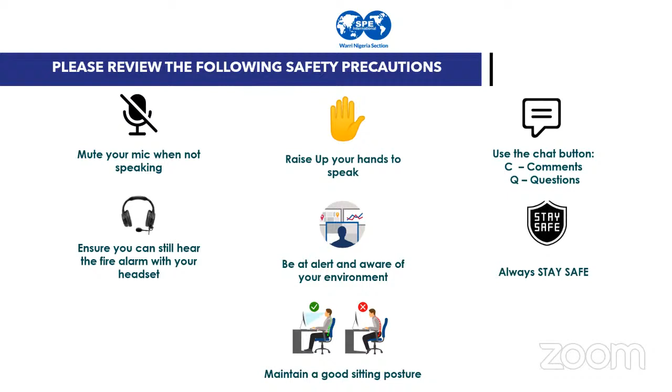Okay, thank you very much, Engineer Chris Egwatu. You can't get it better anywhere else with HSE remarks other than when it's coming from Engineer Chris Egwatu, the one who has been at the helm of affairs of HSE at even the council level for some time now. Thank you very much, sir. We appreciate the safety remarks you've given to us, and I'm very certain that we would abide by them and run with them in the course of this program and even beyond.

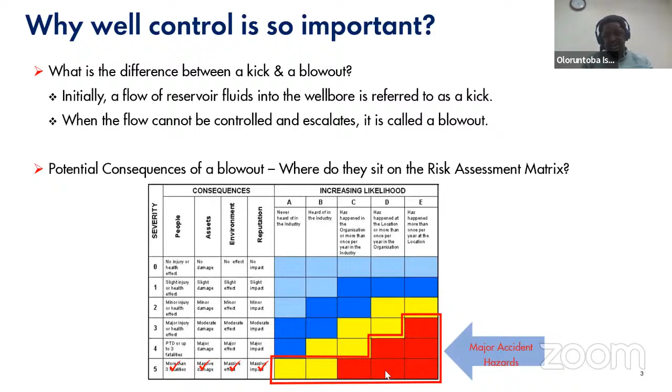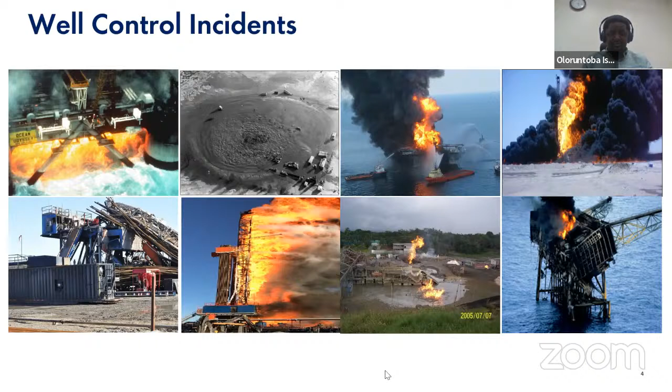Recently this year, in March, somewhere in Central Africa, Gabon, about 6 people lost their lives due to a well control incident. About 6 years ago, I think 2018, in Oklahoma in the US, Pryor Trust, we had about 5 people losing their lives as well. And that's just in terms of lives - there's also significant impact with regards to assets, environment, and so many other things.

And that's why we have this session. It's important that we understand how we prevent well control incidents from happening, and even when they do happen, how do we manage it? How do we enter what we call the recovery mode to prevent it from escalating.

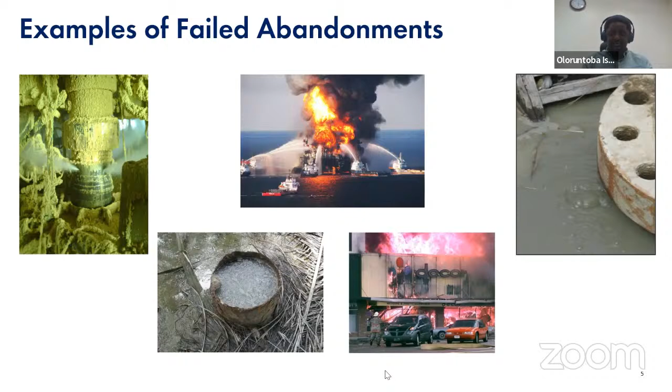In 2021, IOGP, the International Association of Oil and Gas Producers, released a report showing that of a couple of incidents reviewed, the majority of causal factors were due to human factors and human behavior. Some other aspects had to do with barrier failures and improper assessment of risk, or not properly appreciating the risk involved, and some other bit had to do with not following the procedure as required. That's why this presentation will cover some of these things, because I think it's quite critical.

One of the things I'm going to show you in a couple of slides is that even if your equipment is fit for purpose, functional, and spot on, and even if you have the best procedures and programs in place, you also need to consider the human behavioral aspect. This is an aspect that hasn't been in the industry for so long - post-Macondo it's come up, and IWCF and other well control regulatory bodies have tried to embed this even in terms of training and competence.

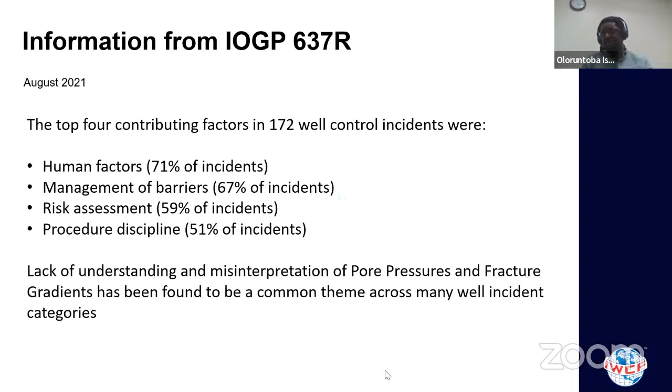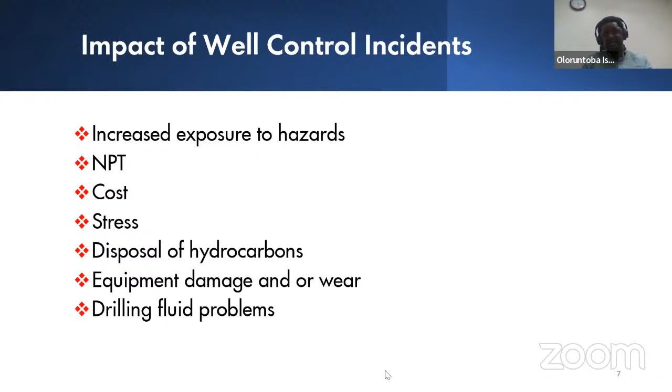Okay, so impact of well control incidents. I showed you a couple of pictures. Apart from downtime and non-productive time, there's significant impact in terms of cost, equipment damage, and exposure to hazards. Remember, you are in the oil and gas environment, and all these things are flammable.

So HSE impact, deaths or injury. I reeled out a couple of numbers, which is quite sad. Of course, you also have pollution, whether it is air, land, or water. The remedial costs post Macondo incident cost billions of dollars just because of the impact on the marine and water body.

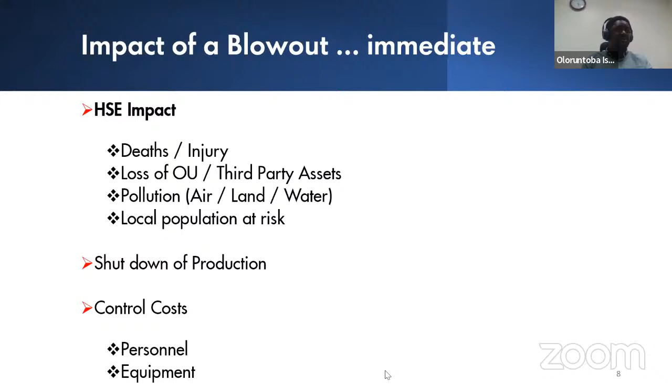Same with land and even the air as well. Of course, you put in the risk, you put in population close to that place, especially land locations at risk, and all of that. You would have to defer production, everything shuts down, and then of course, damage to equipment significantly as well, your company image, or what we call reputation. There will be a lot of questions asked about your ability, your capability to deliver going forward. And then of course, you could have a couple of effects in terms of the reservoir.

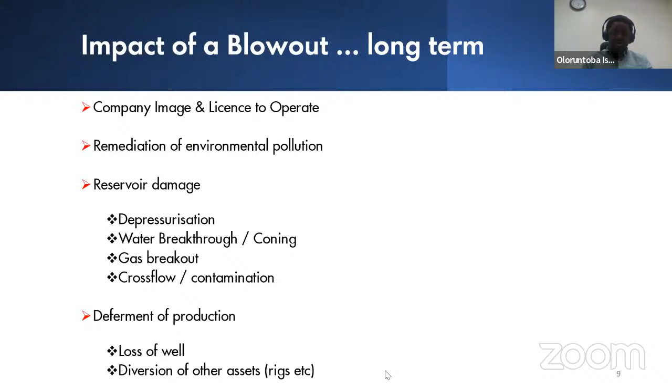So that's why it's important knowing that, when well-control incidents do happen and they escalate, people can die, equipment can be damaged, the environment can be affected, assets can be significantly impacted. That's why it's important we know this, and we would look at it in these four broad areas.

So for people, I'm going to be discussing a couple of things around the principles. Because of time, I'm just going to touch a couple of principles. There's so many principles governing well control, but we'll just touch a couple of them, and then we'll look at procedures. If your well-control incidents have happened, what then do you do? How do you recover? And what are some of those equipment that help you manage or mitigate against such events.

Yeah, so I'm going to continue with people. Let's look at people. Like I said before, research has shown that many incidents are due to human errors. In fact, I mentioned more than 70% of that is due to human factor. We're talking about behaviors. So you can have your equipment perfect, you can have the best programs, but then, what about the people bit?

And one of the things the IOGP did was they looked at the aviation industry. Yes, if you look at the number of wells we are drilling or working over activities in a year, it is not anywhere compared to the number of planes or aircraft that fly every day. And yet we hear very few plane crashes happening. Yes, they do happen, but they are very few, compared to the number of planes flying every single hour all over the world.

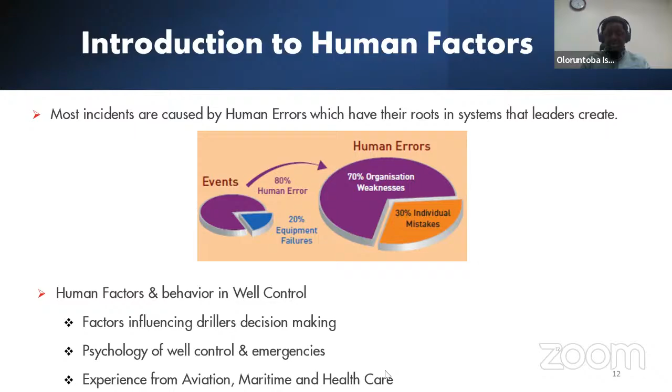And one of the things that the research showed, and the oil and gas industry decided to adopt, was that pilots typically go through some sort of training, not just technical training, but training that has a good impact on their human behavior. So we're talking about things around decision making, situational awareness, communication, teamwork, and leadership. And it's been shown very extensively that these five major elements of human factors are critical if you want to prevent well-control incidents from happening.

What would make the driller, for example, if he sees an alarm that a kick is about to happen, decide to just pick up his phone, and instead of shutting in the well, he decides to first call the company man, and he's struggling to call the company man? The company man is probably in the rig canteen eating food, and he didn't shut in the well on time. And then of course you have significant volumes coming in, and before you know it, it escalates beyond control. Why couldn't he exhibit that necessary leadership or decision-making skill to shut in the well on time?

Why can't people working together on the rig work properly to say, okay, these are my well-control equipment, this is what I should do, this is doing it at the right time. So these five elements of human factors are important.

Situational awareness, things change. One of the things that has been shown from a review of well-control incidents is when you have shifts, when you have a new tour shift, people come in, maybe it's a 12-hour shift, people take a little bit of time to warm up and all of that. Sometimes a couple of errors usually happen that period. What about handover? I'm leaving as the supervisor on my tour sheet. How well do I capture exactly what happened? Communication. What about situational awareness? Things have changed.

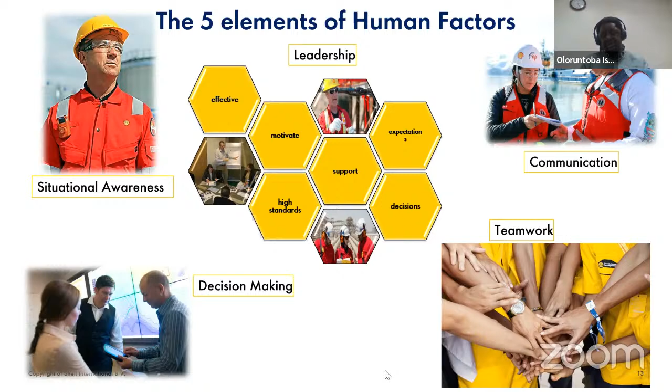And based on recommendations, even globally and even for us locally, one of the things we try to embed is what we call human performance principles, right? So now we're not just focusing on technical training. If you look at the picture showing here, this is a simulator room that we have at the SPDC training school, where we're not just teaching the theory, we test their response, right? So they are drilling a well, there's the alarms and all of that, and we see how well they respond, their decision making, their communication, how they are working together as a team.

So in a couple of well control simulator trainings I've done, I would typically take a rig crew. I'll bring in a driller, I'll bring in an AD, I'll bring in a DSV, about five of them, and put them in there and simulate a well control incident. And then I watch and observe how they respond, how they work together as a team. And initially, you would see a little bit of instability or shakiness. But over time, their response becomes better.

And that's what the aviation industry has done over the years that has given them very good outcomes. And that's the shift now, that it's not just about the equipment, it's not just about the procedures, but the human factors. And simulation-based learning is a very good thing. About 2 months ago, I facilitated training for about 40 rig crew people, and it was quite interesting watching their interactions and getting them to understand better.

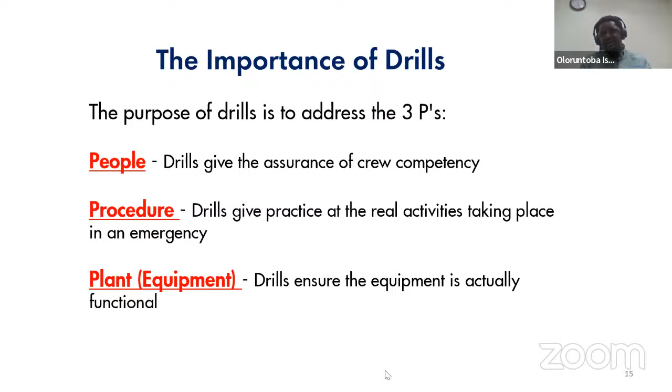The other aspect, apart from trainings and certifications, is the aspect of drills, right? So drills test your response. There's a drill, we're giving the safety briefing, and they ask, if there's a drill, do people respond? So I simulate well control issues, and I check their response time, and I know that okay, these guys need to sit up, or they need to be ready, or they need to be prepared. So your drills do not just test the state of the equipment, not just the state of the procedures, but they also test the readiness and the competence of the crew.

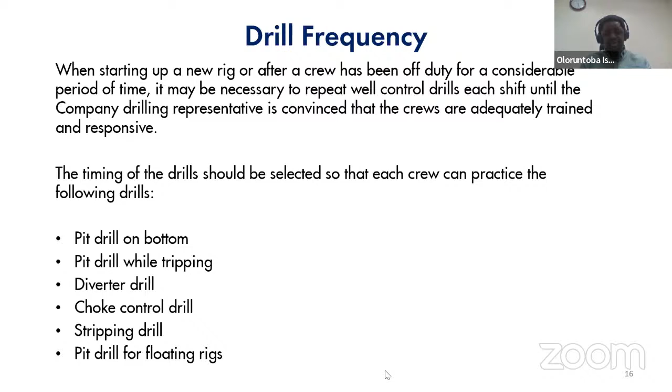And the whole idea is to do this as frequently as possible, especially when you consider the competence of your crew. So if you have a lot of new hands, then you might need to bring them on board quickly and do more drills and get them ready, right? Okay. We've discussed people, human factors, the 5 elements: leadership, situational awareness, decision making, communication, and teamwork. And now we look at principles.

I'm just going to touch, especially because of some of the students in this call, on a couple of the very important principles in well control. One key important principle is hydrostatic pressure. And basically, hydrostatic pressure is just a function of the density of the fluid or the liquid, and the height, right? And when it comes to primary well control, the hydrostatic pressure principle, as simple as it sounds, is probably the basic foundation, a key component.

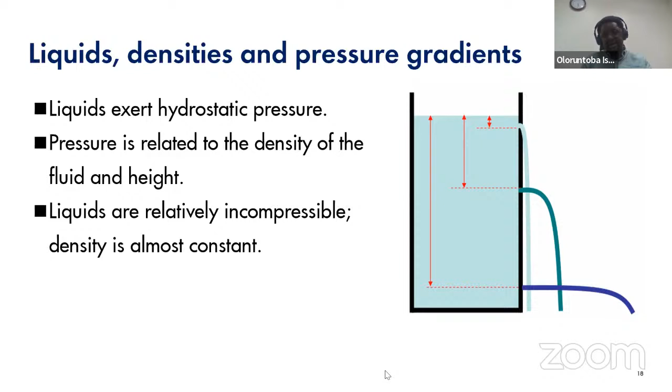And what that means is that for whatever is my fluid barrier, if I get the density right, if I get the fluid level height right, then I will be able to maintain what we call, for drilling, primary well control. So your hydrostatic pressure equation basically speaks to density and to height. So even if you have the same density of fluid as this example we showed, where your density is about 0.585 psi per foot, what this tells you is that at different depths, it exerts different pressures, right?

So even if I'm using a mud of 0.585 psi per foot to drill a well, if I do not keep that well full to the appropriate height, then the hydrostatic pressure is not the same. So hydrostatic pressure is a function of the density of the fluid and the height. Again, density.

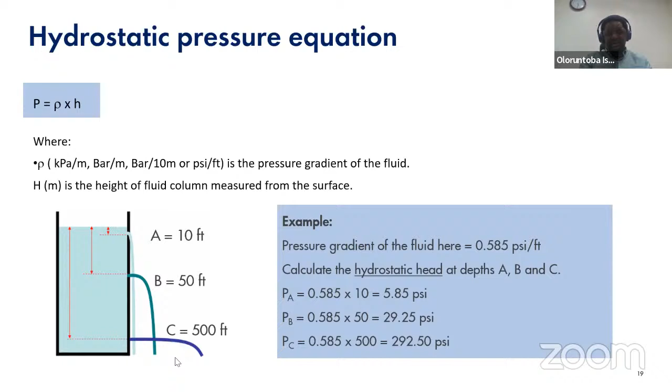So if I'm supposed to use 0.585 psi per foot mud, and the density drops, maybe for example your drilling fluid is in a tank, and that tank is exposed to rain, and water dilutes it, that density is no more 0.585. It's dropped to 0.57. So the hydrostatic pressure has changed, and that key element of maintaining primary well control has changed as well. The second principle is the principle of barriers.

Your barriers can either be mechanical or fluid. When you are drilling, your primary barrier is your mud, your drilling fluid. And that barrier is driven, like I said before, by the density of that fluid and the height of that fluid. So I need to keep my mud density as per plan. I need to keep the height of the mud in my well as per plan. And if that barrier fails, you also have secondary barriers, which is your blowout preventer, and we'll discuss that very quickly. So you have mechanical barriers, you have fluid barriers.

So if my fluid is going to be a barrier, then I must ensure that the hydrostatic pressure, density times height, of that fluid is greater than the formation pressure. And you must be able to circulate and maintain that density. You also must be able to monitor for height. So all of your barriers, whether mechanical or fluid, what we typically would do is to test them, and not just test them, you would typically need to document them as well.

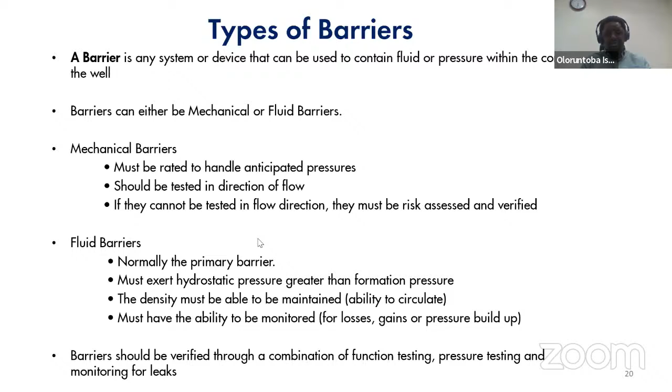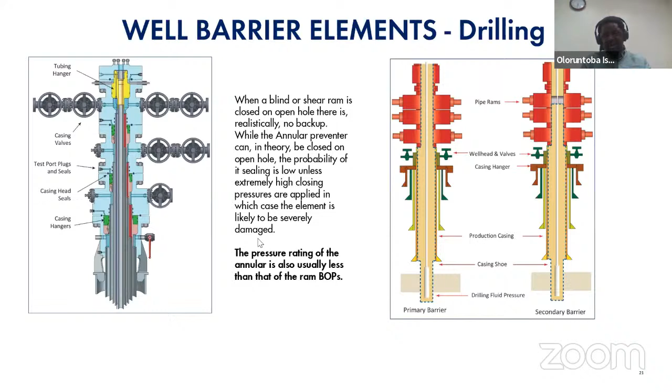So you have different barriers for different operations, whether you are drilling, in the workover phase, or in production. You have both fluid barriers and mechanical barriers. Your wellhead is a barrier, your BOPs are barriers, your cemented casings are barriers, depending on the phase of operation, your Christmas tree, your tubing hangers, all of that can be barriers depending on the particular operation. The third principle is the principle of risk management.

Going back to barriers, when I teach rig people, I always like to emphasize the principle of barrier, and I tell people that the fluid is an important barrier. Sometimes when I'm working as a supervisor on the rig, I tell them, make sure your mud tanks are properly covered, let water not dilute the fluid. And people wonder why I'm making so much hassle. It's because if that density is reduced, I already have issues with my barrier. So I teach that you have primary and secondary barriers, and it's important that your barriers are fit for purpose.

The next principle is risk management. You have hydrocarbons down there under significant pressures and huge temperatures, and those things are hazards. Anything that has the potential to cause harm is a hazard. And things that can release that hazard are threats. So you want your hydrocarbons to be contained in a safe manner. When drilling, your mud is the primary barrier, and if it fails, your secondary barrier, the blowout preventer, prevents a blowout. But there are certain threats that can release these hydrocarbons to surface. I'll give an example.

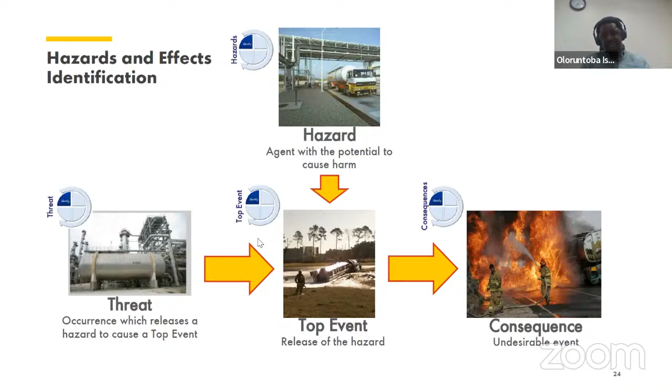So you want to be able to understand this principle of managing risk. If your situation changes or the operations change, you must be able to understand the new risks that are associated. So we always want to manage our risk, right? Your program is a preventive barrier. Having a very good procedure, having your mud checks from time to time, every 30 minutes, for example, is a good procedure. Having calibrated equipment, a calibrated mud balance, is a very good preventive barrier, right?

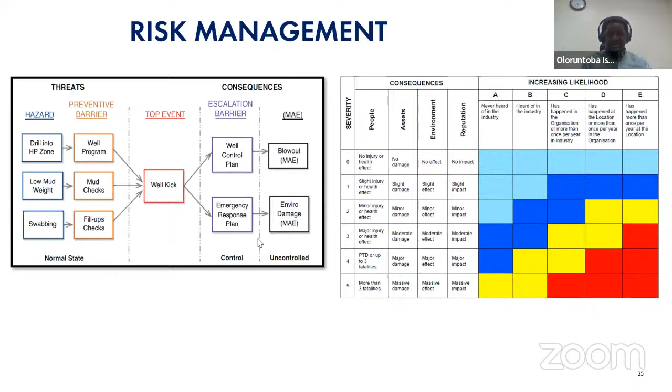Once those incidents happen and you enter recovery or escalation mode, you're basically entering the emergency response plan. You can imagine the Macondo incident that happened. You have the source of hydrocarbons feeding the fire. The only way you can stop that fire from burning is if you do something to that source. And so what do I need to do? You need to maybe drill what we call a relief well, some location or some distance away, to intersect that source and quench it.

And you can imagine how long that would take you. Get a different rig, get a new location. If it's land, do location preparations, get new casings, get new drilling equipment and all of that. When blowouts happen, the recovery usually will take a very long time. You don't want that to happen.

Drilling window. So the drilling window is defined by, remember I said the primary barrier is your mud. That mud weight is usually between two factors. The lower limit is your formation pore pressure. So what that means is that I want my mud weight, the hydrostatic pressure, density times height of my mud, to be greater than the formation pore pressure. But I do not want it to be so great that it is greater than what you would call the formation strength, what we call fracture.

So you can imagine if I have a bottle of water that is full and I have holes at the bottom, what will happen is I will start having the fluid leaking down. And once I have fluid leaking down, what happens to the level of water in the bottle? That level of water drops, height drops. Hydrostatic pressure is density times height. Your height has dropped, your hydrostatic pressure has dropped. So your barrier is already failing, right?

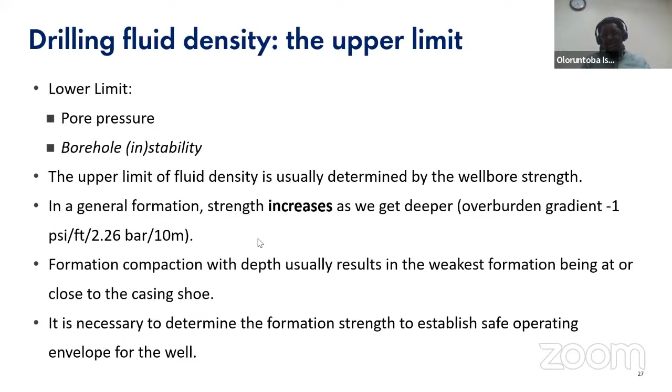So you want your drilling window to be between the lower limit of your pore pressure and wellbore stability or collapse, and the upper limit is the fracture strength. And typically, we want to always operate within that window, and that's why your mud weight is usually designed to be within that window. Yes, there are some regions where you might have what you call a narrow margin. That window might be very small, but you have systems in place, what we call managed pressure drilling, to address such issues.

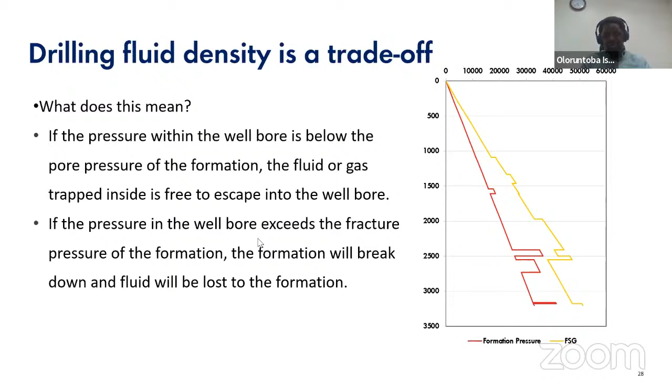So basically, if your mud hydrostatic pressure is greater than the formation pore pressure, then you are fine. Once you lose that overbalance, your formation fluids will begin to enter as a kick. And if you do not control that, it escalates to a blowout. So what are the three levels of well control? I've talked a lot about primary control, and I said, remember, hydrostatic pressure is a function of your mud weight, or density, and keeping your hole full in terms of height.

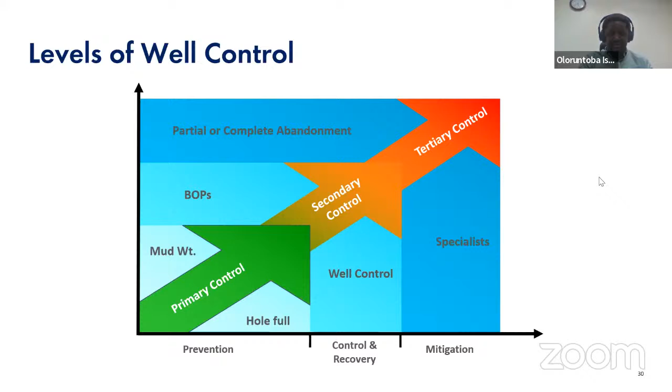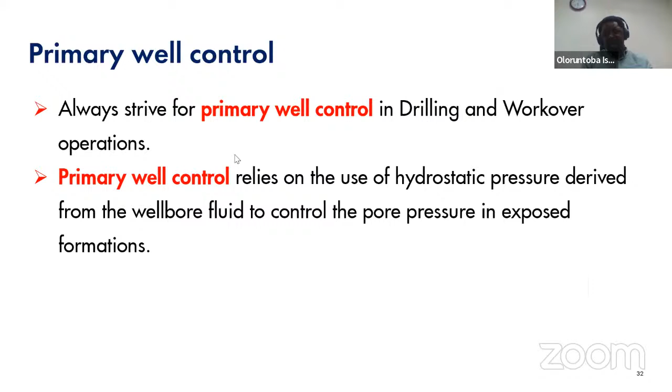And then the secondary method, which is now your control and recovery, is what you call your blowout preventer. And then the final one, if that fails, like in the Macondo incident, you are basically at the tertiary control measure, where you basically have to call in specialists, maybe the Boots and Coots of this world, to do that. And you really don't want that to happen, because you are significantly out of control. Okay, so we always strive for primary control, especially in drilling and workover operations.

When do we lose primary well control? We lose primary well control when the bottom hole pressure, or the hydrostatic pressure, density times height, is no longer greater than that formation pressure, right? So the way I always explain it is there's an equation. My mud hydrostatic pressure, density times height, must always be greater than my formation pressure on the right hand side. That formation pressure for some reasons can be greater than what you expect.

Usually that will happen in exploration wells, where at best you predict that pore pressure. So you were predicting that your formation pressure will be 0.52, and you designed your mud hydrostatic pressure to be 0.54. But when you drilled, the actual formation pressure became maybe 0.56, and then you go underbalanced. So you call that a drilling kick, right? That is usually expected in exploration wells.

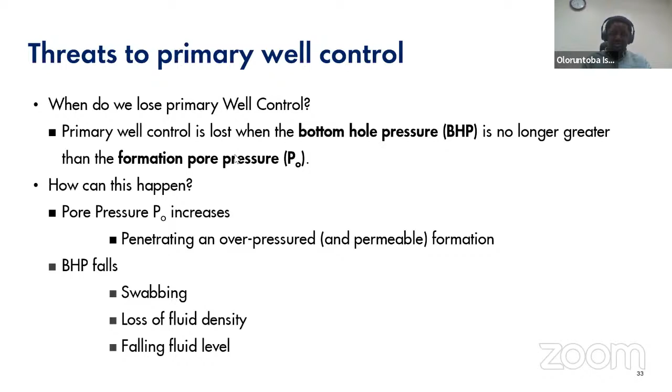With development wells, you have data over time. You have very good knowledge of pressures, right? So that's the right hand side of the equation. The left hand side of the equation is your hydrostatic pressure, the mud density times height. So anything that affects the density, causes it to drop, you will lose your hydrostatic pressure and your BHP. Anything that causes the height to drop, you lose that. So if your fluid level falls or you swab and that affects the fluid level as well, you are going to lose primary well control.

Swabbing very quickly: there are two levels. Basically, when you are pulling your pipe out of hole, what you are doing is to fill back the volume displaced. So you want to fill your hole back as you're pulling out the pipe and use your trip tank to do that. So you want your mud level to always be full. If you pull too fast, faster than the way you are filling back, your level will drop significantly. If your mud is too viscous or too thick, it's not flowing as quickly to fill back your hole, you can have what you call low volume swabbing, right?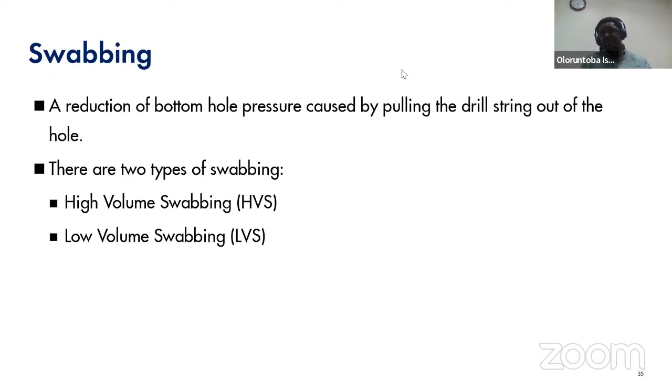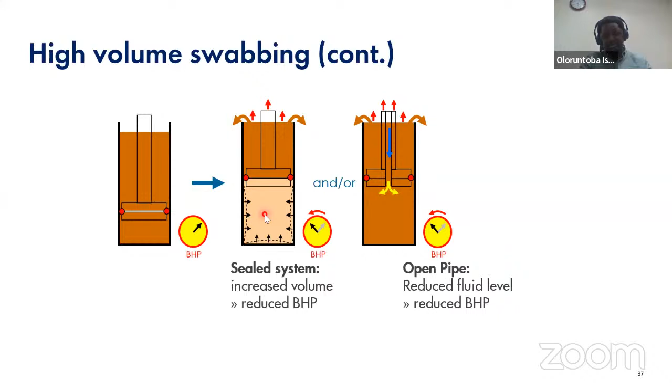And this is quite very serious. One of those incidents that happened recently, I think in Gabon, was due to swabbing. So swabbing can be very dangerous as well. So if I'm pulling too fast, for high volume swabbing, basically you might have your bits balled up or significant pack off. So the fluid level in your annulus is not dropping to fill that place. So you are creating a vacuum down there. And because of that, the fluid level in the drill pipe will drop to fill that vacuum. And once that fluid level drops, you are going to have significant bottom hole pressure dropping as well.

That can be very dangerous in very large holes, like top holes, where your hole size is big. So basically, you are filling a very big hole size from a small volume of pipe. So the fluid level in the pipe will drop significantly because it's going down to fill a very, very large vacuum. And that can be very dangerous as well.

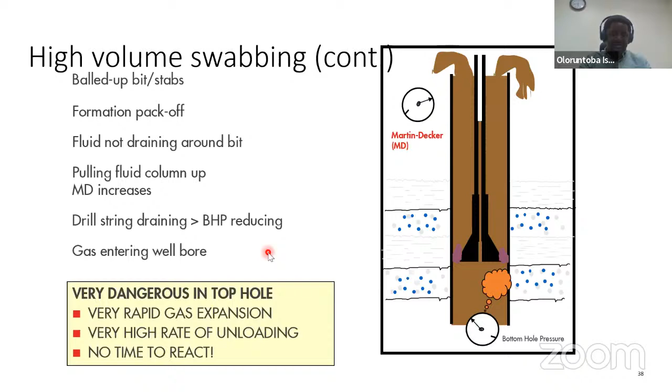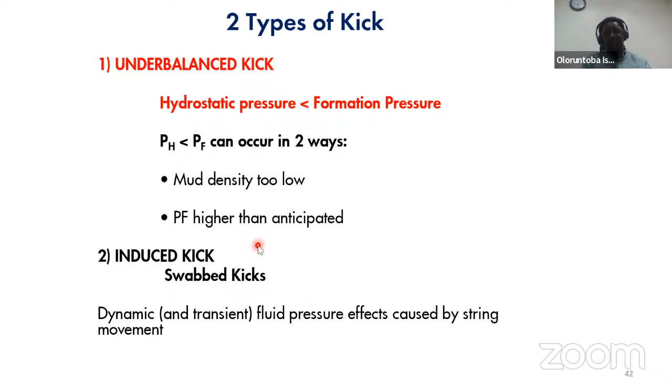So I've made a couple of definitions. I said kick is inflow, and if it's not managed well, it would lead to a blowout. And remember, if you are drilling exploration wells and your formation pressure is significantly greater than your mud hydrostatic pressure, you would have what you call a drilling kick. Whereas the other is usually a swab kick. And research has shown that most of the well control incidents when drilling are actually due to tripping errors, right? Not keeping your hole full, not monitoring your mud density properly, and a couple of other things.

So when you have a kick, whether it is a drilling kick or a swab kick, you will typically have warning signs. If it's going to rain, typically you will see the signs. The clouds will change. You might get some thunder. It's the same thing. We have warning signs that there's trouble coming, right? So you have kick warning signs. Then you have kick indicators. Your kick indicator is a strong signal that your kick has happened. But kick warning signs do not necessarily mean that the kick has happened. It's a sign that something is about to happen.

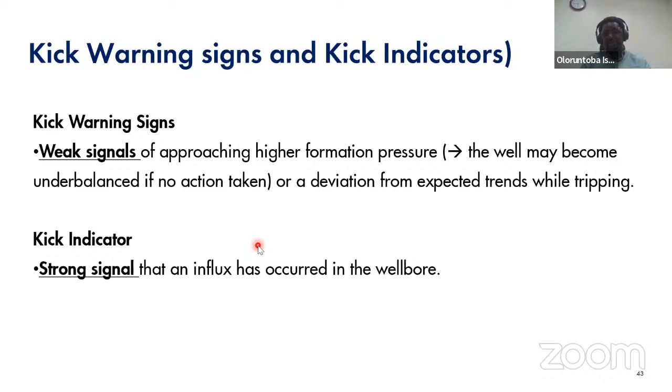So kick warning signs: you have what you call a drilling break, a change in your rate of penetration. You would have your mud chloride content increasing. Your formation fluid has its own chloride content. When the chloride content from the formation fluid is mixing with the chloride content of the mud, you will see an increase in the overall chloride content you are measuring, right? You will see significant gas readings. All of a sudden, that formation pressure that was under control is beginning to overpower your mud hydrostatic pressure.

So you see gas readings coming up, and significant change in mud properties, changes in cutting size, what you call splintered cuttings, cavings as well will come out. Those are key warning signs, and you need to quickly readjust. Either you're doing a flow check or circulating, just make sure you are ready to deal with that.

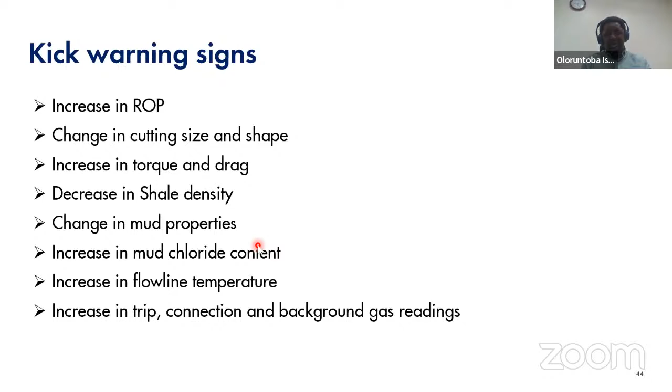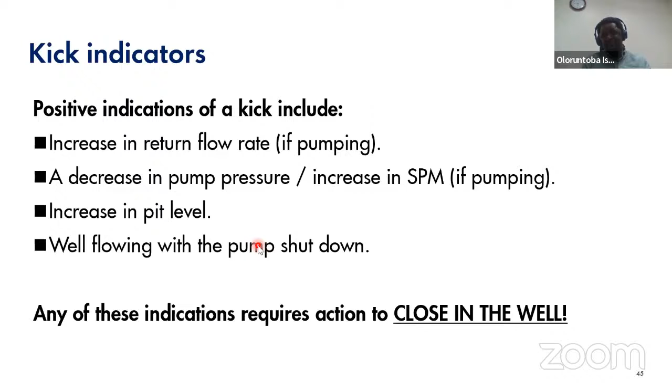But in terms of kick indicators, sure signs that the kick has happened, you basically have three basic ways to know. The first one is an increase in return flow rate when you are drilling. You would see all of that happen. So you will see your pit volumes increase as well, and your flow should increase as well. In the return line, all your fluid comes out through the annulus, through the return line.

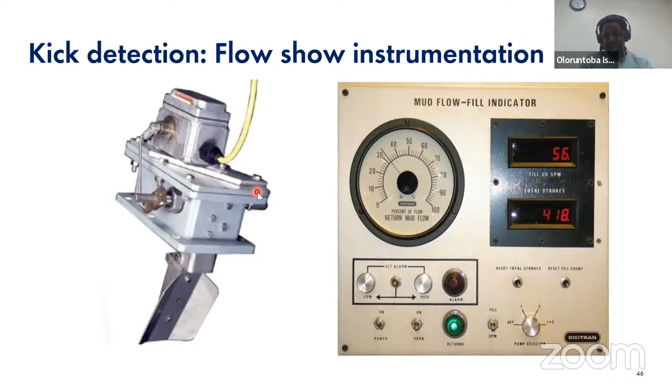If the rate of return of fluid drops significantly, what has made it drop? It means you might be having what you call losses. Your fluid level might be dropping as well, and that can be dangerous as well. And then, of course, your pit volume basically captures the total volume. So it's a closed loop system.

I expect to see maybe 100 barrels. Why am I seeing 105 barrels? Where is that 5 barrels extra coming from? It's a sign that something has come in from your formation to mix with that 100 barrels. That means you have a kick and you need to shut in the well, right?

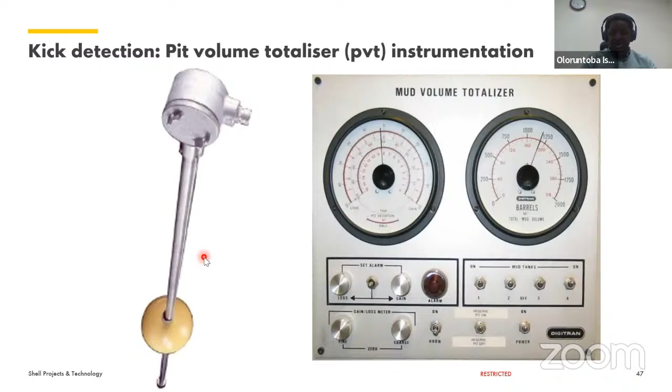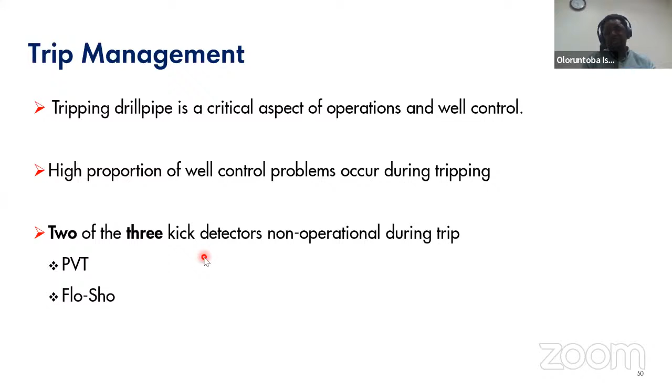The third method is when you are tripping, right? Because you want to keep your hole full at every single point. Tripping means you are running in and pulling pipe out of the well. So we have a method of managing that tripping, and we use what we call a trip tank. A trip tank is a very small volume tank that can record significant changes in the height, in

the level of fluid. Basically, what that means is that if I'm pulling my pipe out of hole, I'm going to want to fill back that volume of steel that I've removed with fluid from the trip tank. So if I pull out pipe equivalent to a volume of 3 barrels, my trip tank will feed back 3

barrels. If my trip tank only feeds back 2 barrels and my hole is full, why is it two instead of three? Where is that one coming from? That one is coming from somewhere below the ground. Like you have a kick. This for me is one significant reason why we have so many incidents while drilling. Many rig people do not know how to use their trip sheets to record these volumes, right?

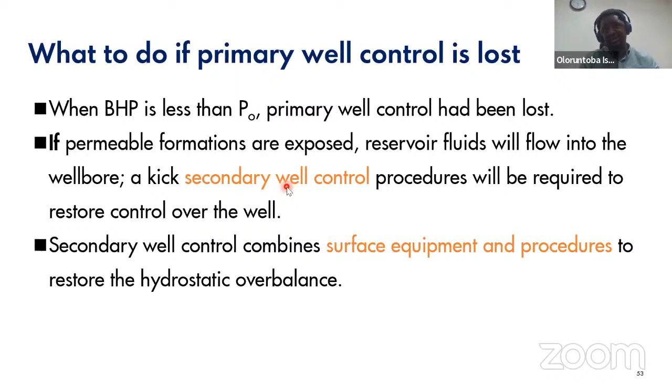So if your primary well control has failed in drilling, which is your mud, then you move to the secondary well control. In that mode you are in recovery mode. So you need to shut in the well, right? You have two methods of shutting in the well: soft shut-in or hard shut-in. Basically, many operators prefer the hard shut-in.

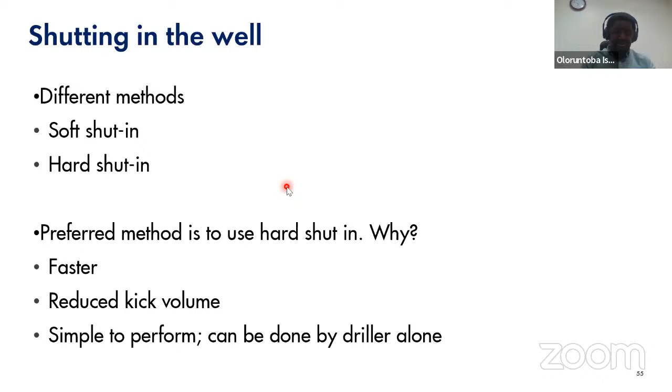So what that means is my mud hydrostatic pressure has failed. So what I need to do is to shut what you call your blowout preventer. So you shut the annulus. You do what you call your space out, and then you shut in the well. The difference between hard shut-in and soft shut-in is usually in terms of the choke lineup, right?

So with hard shut-in, your choke is usually fully closed, and this valve, what you call an HCR valve, is usually closed. So I'll space out and close my BOP stack somewhere here, and then I can come and open this valve and read the pressures. But in soft shut-in, this choke is usually open, and instead of closing the BOP stack first, you first open this HCR valve, then you close your BOP stack, then you come and close your choke.

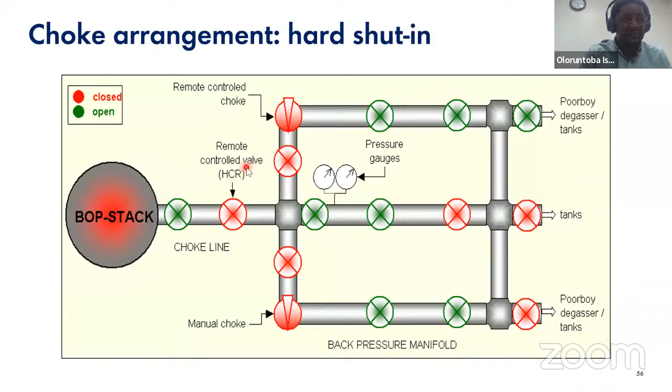There's a school of thought about the different methods, but for many operators, we prefer to close in. The less volume of influx you take in, the less pressure you would eventually see. And when you're shutting in the well, you're in recovery mode, you need to be able to recover that kick, that influx, that intruder. I want to take it out in a controlled manner.

When I teach, I always tell people that the way I would chase a visitor from my house is different from the way I would chase, let's say, a family member. If I want a family member to leave, I need to do it in a very controlled manner. Same thing if you have a gas influx or a kick in the well, you need to take out that influx in a stable, controlled manner. If not, if you just drive it out, it will cause serious damage when it is leaving your well. So there are different methods depending on the scenario.

If you have a string in hole and you can circulate, you typically want to use the driller's method. Each method has its pros and cons, but the driller's method while drilling is usually the preferred method. If you are doing workover wells, you might want to do reverse circulation, which is pumping into the annulus and taking returns through your string via a communication path.

So there are different methods, like wait and weight. In wait and weight, you are waiting while you prepare a mud with enough pressure to overcome and take back control. But for the driller's method, basically you do two circulations: drive out the intruder first while you're preparing the heavier mud weight, and once you've driven out the intruder, you can pump in the heavier weight. For wait and weight, you wait until you have your heavier mud weight before you pump.

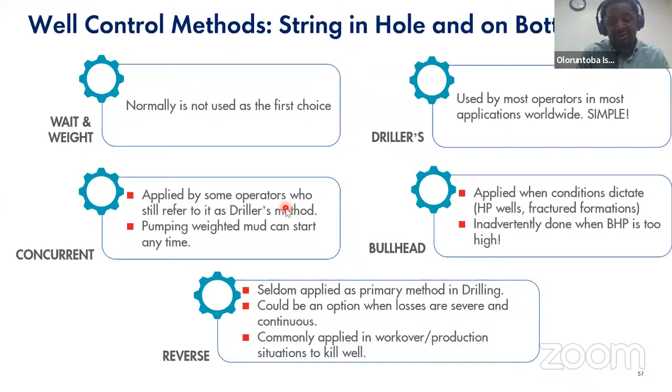Bullheading, you might want to do that if you don't want your kick to reach surface. If you are drilling in regions where you have H2S, which is quite dangerous at surface and a risk to people, you want to bullhead that H2S back into the formation. Subsurface engineers and ourselves typically won't like bullheading because of the potential damage to the formation.

Now let me wrap up quickly due to time. The last bit is well control equipment, and there are different aspects to it. You have the blowout preventer, which is a collection of different devices, valves, or tools that help you in secondary recovery mode. You have the annular preventer, a spherical device that can close around any size of pipe, even if you have a pipe in hole. It has annular elements that close in on the well.

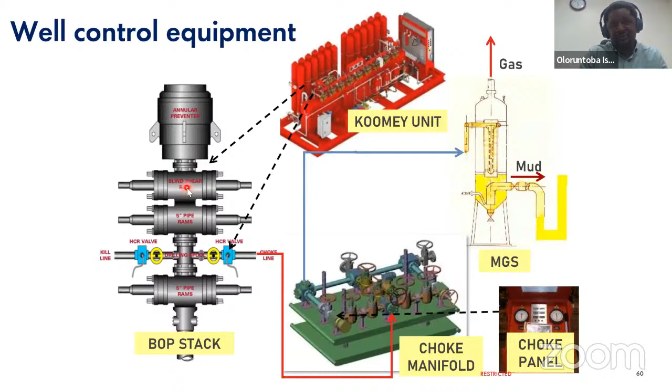You have your blind shear ram. This is usually your last resort. It will cut off and seal the hole. Because it cuts off the pipe, that pipe will drop down to bottom, so it's your last resort.

You have your pipe rams, which close around a specific size of pipe. So if you have a 5-inch pipe ram, it will only close around a pipe that is 5 inches in OD. You also have variable bore rams, which close around a range of pipe sizes, say from 4 inch to 7 inch. So you can have different configurations for your blowout preventer.

This is your secondary recovery method. How do these things close? They basically use hydraulic fluid to move pistons that close and seal around the pipe. That hydraulic fluid comes from what we call the accumulator unit, where the energy is stored. When you activate and push your BOP control panel, it sends a signal and pushes those fluids to close these preventers. You must test this equipment.

Whatever function test you do, you must also pressure test the connections, just to make sure that everything is fit for purpose.

When I want to bring out the gas from the well in a controlled manner, I direct the flow through what we call a choke manifold. The choke manifold is basically a collection of valves that allows you to put some back pressure.

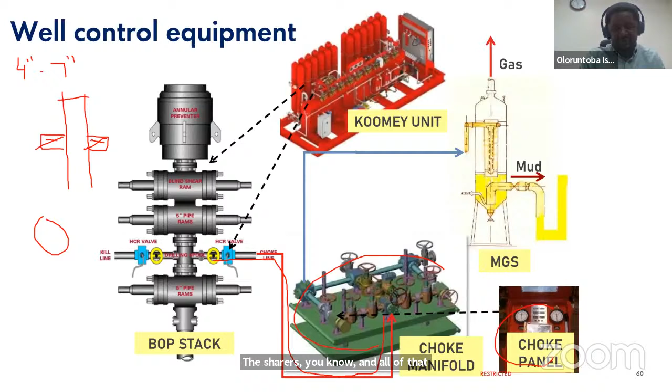So you have different blowout preventer equipment, whether it's the annular type, the ram type, the shear rams, and all of that. One last thing I'd like to say is that your preventers, your BOPs, seal off the annulus.

So if I have hydrocarbon coming, I've sealed off the annulus. But this hydrocarbon can still come in through your string. Typically what we'll do is install what we call a full open safety valve on top of the string if you are tripping in the well, and isolate this string.

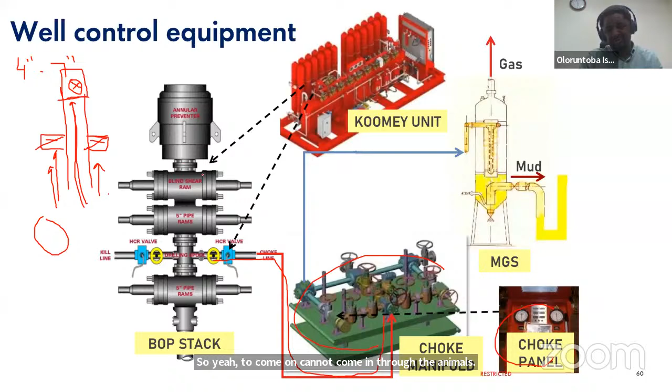If your pipe is connected to the TDS, then of course it has those measures. But if you are tripping out, you install this valve. This isolates it, so the hydrocarbon cannot come in through the annulus or inside through the string. There are barriers preventing that from flowing and coming up to the environment.

Because of time, I tried to rush a bit, but that's where I would pause for now and take some questions. Thank you so much for this opportunity.

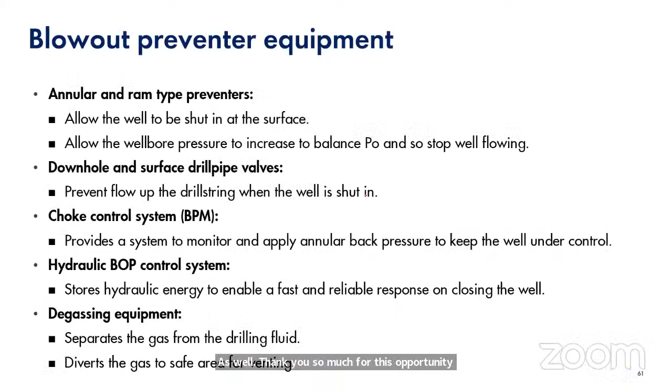Thank you very much. Thank you so much, our facilitator, for today, for this wonderful session. Like the section chair rightly mentioned earlier, this is something you would pay a huge amount of dollars for, because you can't easily come by this. Thank you very much for this lecture. For me, I see that it makes a lot of sense, a lot of learnings and insight from it.

It talks a lot about the bow-tie operationalization, trying to keep your hazard on the left-hand side at a tolerable level so that the top event does not happen. And even if you begin to see signs of top events happening, trying to put systems and controls in place so that it doesn't lead to the consequence. Thank you very much, sir, for this one.

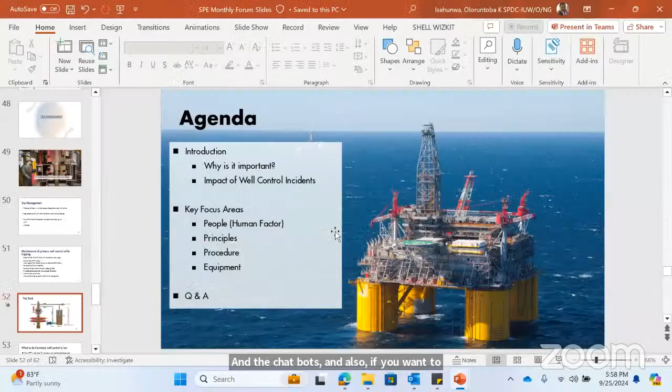However, already we have some beautiful comments in the chat box. We have Justice Vidigon, the immediate past YP chair Port Harcourt section, thank you for joining us, saying thanks for a very insightful session. Thanks Engineer Toba. We have Andrew Abadu, also a board member, saying thank you so much. Bobomi Bimo Bere, thank you sir for that session. Excellent delivery from Paul Alabi. Gloria says thank you so much. We have a question here, and the section chair is also adding his voice to thank Engineer Toba for the interesting lecture.

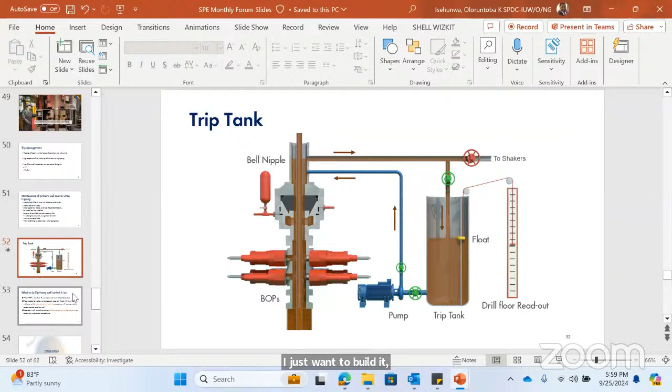So we have a question from Ebimo Bere Bobomi, and it says: I just want to know if the BOP preventers are calibrated this time. Engineer Toba, you might want to respond to that.

Your BOPs all have a rated working pressure. That is driven by the maximum pressures you expect to see on top. If I'm drilling high pressure, high temperature wells, you want a BOP with a rated working pressure of up to 15,000 psi, so it can handle anything up to that. Usually the rams and the annular will be slightly less rated, maybe 10K. That's allowed.

If your pressures are not that high, you can have 3K or 5K, 5,000 or 3,000 psi BOPs rated to that.

But what you also want to do is test. So function test—you are testing the controls. When I go to my control panel, those signals send hydraulic fluid that activates a mechanism to push the pistons and shut the well in. You want to function test that everything is working well. You also want to pressure test the connections, because everything is about containment. If the BOPs are working well and you're in secondary recovery mode, the hydrocarbons will definitely be contained.

So you do that function test every week, and typically we do the pressure test every 3 weeks. But what is also important is that the rated working pressure for the BOPs is appropriate for the specific kind of wells you are drilling.

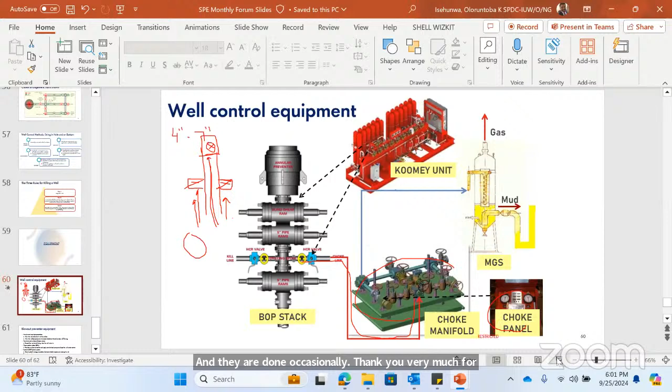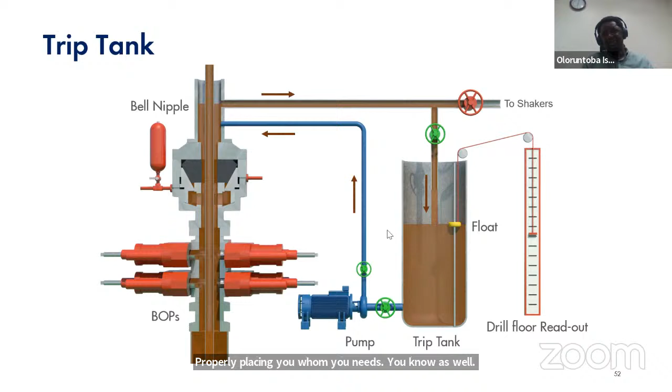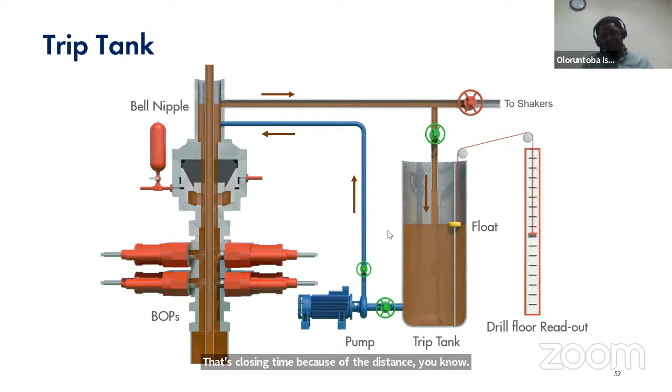That's also another reason why in subsea wells, because you are drilling in deep water, they have an indirect hydraulic system of closing the BOP, to minimize that closing time due to the distance going down deep beneath water. You might have what you call subsea BOPs even down there on the seabed as backup as well.

Thank you very much, thanks so much for that elaborate answer. I can no longer see questions in the chat box and no raised hands, so I think it is quite clear. Thank you very much for making it very short and rich—it's very rich, yet came in a very good time.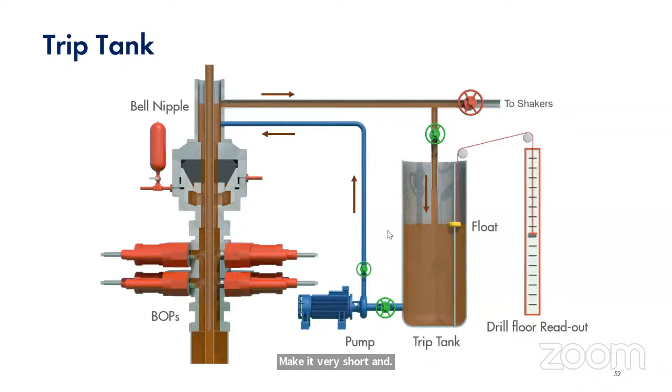But yet again, there's another question that says: under what condition is underbalanced drilling recommended? So you may want to also just state what underbalanced drilling means and then give us a response on what conditions we recommend underbalanced drilling.

Well, fortunately for us in Nigeria, our reservoirs, in terms of permeability and the ability to flow the fluid, do quite well, right? But you have some regions, especially in North America, where it's difficult in terms of what you call tight formations, where the permeability is not very good. So fluid is struggling to flow. So you are not going to now bring something of great force to just overpower it. Basically, nothing is even going to flow really.

So what you usually would do in those conditions is to use maybe some managed pressure drilling mechanism, just managing. So you have some places where you even need to frack before you can squeeze out some of those hydrocarbons in there. So for underbalanced drilling, typically you can use managed pressure drilling, which is a way of just managing the pressures in the wellbore while you're drilling in underbalance.

So you can go below, like I said, the formation pressures, because fluid flow is not as good as it is. So you have very minimal risk. So all of that has to do with risk assessment based on the different formations. And like I said, you have the MPD system that can help you drill as well.